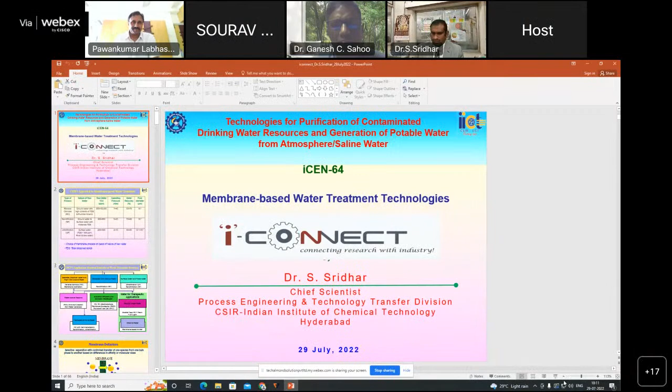Thank you very much, Dr. Pawan. I hope my screen is visible and I am audible. Yes, and really very happy to be on iConnect and also to present our experiences as far as water treatment is concerned, especially membrane-based water treatment.

As Dr. Pawan has introduced, this is mostly for purification of contaminated drinking water resources, as well as generation of potable water using an atmospheric water generator, and also treatment of saline water.

So mostly CSIR's approach to membrane-based water treatment has been based on the TDS as far as drinking water is concerned, based on the total dissolved solids. Several labs led by CSMCRI Bhavnagar, with their indigenous RO system, have been treating groundwater, brackish water and seawater with desalination, using seawater RO membranes and brackish water RO membranes.

We also operate at high pressure, and we now have nanofiltration technology coming up quite well, with IICT contributing for moderate TDS groundwater, because we need a TDS below 500, and it is not necessary to go for RO for all the different types of water resources that are available.

So for moderate TDS groundwater, and to some extent surface water, with lower rejection nanofiltration membranes, we can treat both moderate TDS groundwater and surface water.

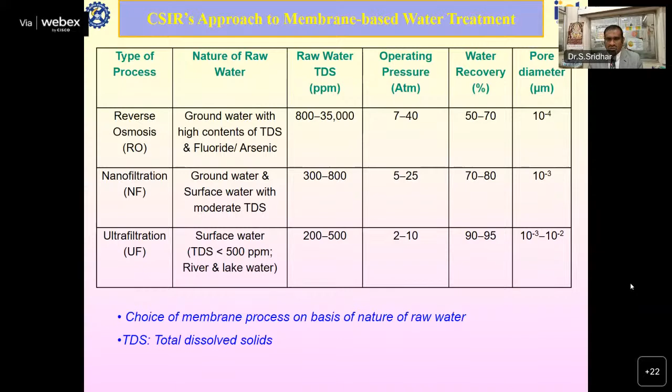Apart from CSMCRI, IICT, NEERI Nagpur is quite involved in these activities, and then CSIR-CGCRI is also there. NCL Pune has been in the forefront, and CMERI Durgapur is also there. So all these labs have been working on this.

IICT's application has been an application-oriented selection of water treatment processes. As we can see here, seawater and brackish water RO has been at the forefront for high TDS groundwater and sea and brackish water, whereas for moderate TDS groundwater we have preferred nanofiltration over RO.

And then for flood water, especially during the floods in Kerala, and then of course in Maharashtra in Sangli, and then Gokak, etc.

In Karnataka, and also several states - Bihar, Assam - we have covered Orissa and West Bengal. We covered West Bengal with nearly 10 plants for both Yas and Amphan cyclones, using hand pump operated ultrafiltration systems, which can later be converted to power driven ultrafiltration once normal power supply is restored after the floods. At some points we have also tried nanofiltration for pond water.

In water scarce regions, we are looking at atmospheric water generators. I'll show a brief video on that.

As far as industrial effluents and domestic wastewater are concerned, apart from the pressure driven processes, we have also tried electrodialysis. CSMCRI is working on unsupported membranes, which work very well for electrodialysis - they are polystyrene based. We have also been using electrodialysis for desalination and deacidification of effluents, and we also have membrane bioreactor technology across CSIR and microbial fuel cells.

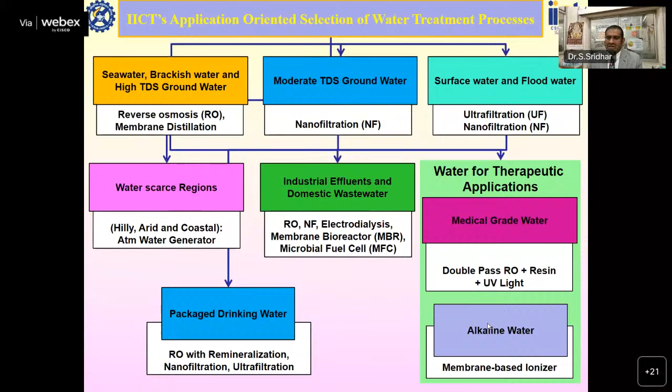Then recently, alkaline water up to 8.5 pH is preferred, so that we are within the BIS limits, but at the same time it can prevent hyperacidity and joint pains.

I will not go too much into the detail of what exactly membrane processes are, as most of you will be aware of that, but just for the sake of the audience - a membrane is a thin barrier that separates the components of a liquid or gaseous mixture based on not only molecular size, but sometimes affinity based separation as well. So size based exclusion at times, depending on porous membranes, and when you have non-porous membranes, you get affinity based separation.

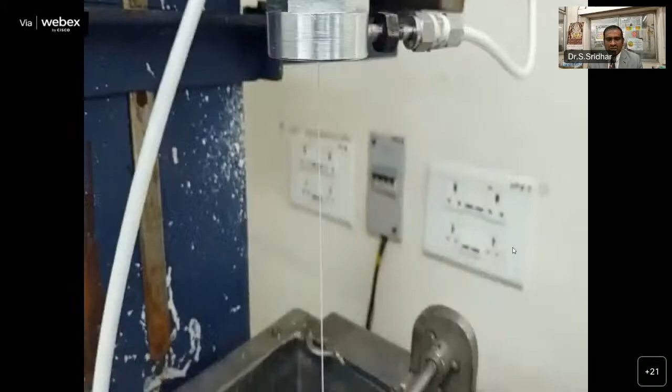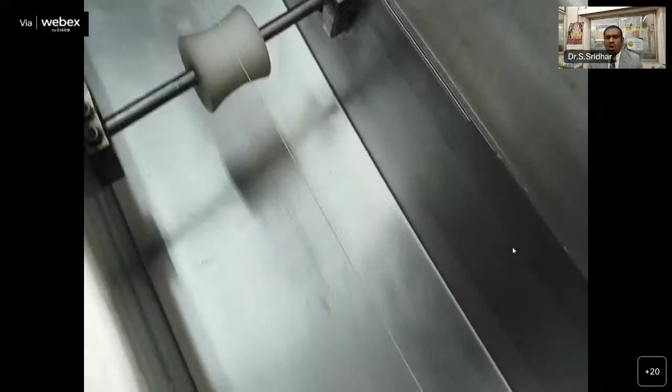This is a video on the hollow fiber membranes being developed at IICT. You have a polymer tank here, and then you can see the hollow fiber membrane, which has a bore generated by using a bore fluid. Polymer fluid flows on the outer concentric opening, and from the inner opening you have a bore fluid coming out, which is mostly water, mixed with a polymer solution in a solvent.

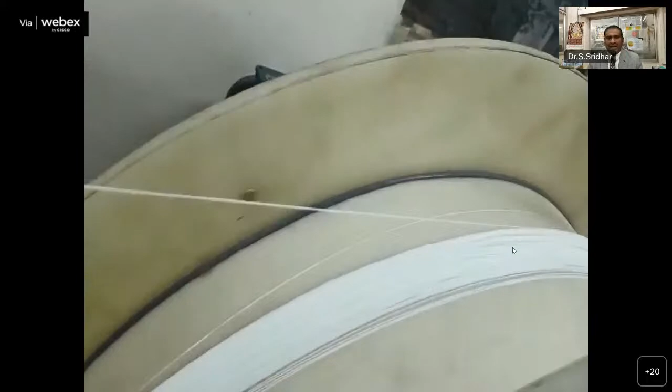You get a homogeneous honey-like solution of viscosity about 5000 centipoise, and then you can draw fibers at the rate of 30 meters per minute. With a 1 kg batch you can draw about 5 to 6 kilometers of fiber and make several modules from that - so high surface area per unit volume, ladies and gentlemen.

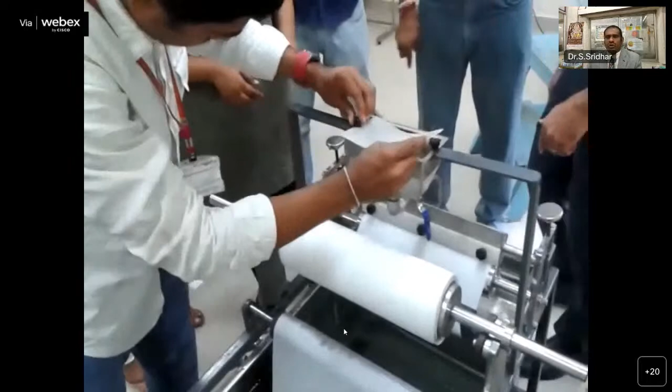We also have flat sheet membranes, and this particular machine gives a flat sheet of 14-inch width, which is then trimmed down to 12-inch width, and modules are made. Larger machines are also available at CSMCRI Bhavnagar, who make bigger modules - that is 8-inch modules as well.

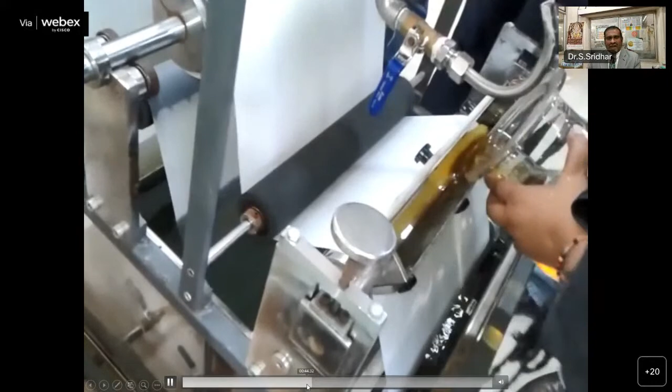These systems now use, for example, the phase inversion technique for flat sheet. Here, unlike the hollow fiber, it is not a self-supporting structure, but you have a porous substrate that gives mechanical support to the membrane.

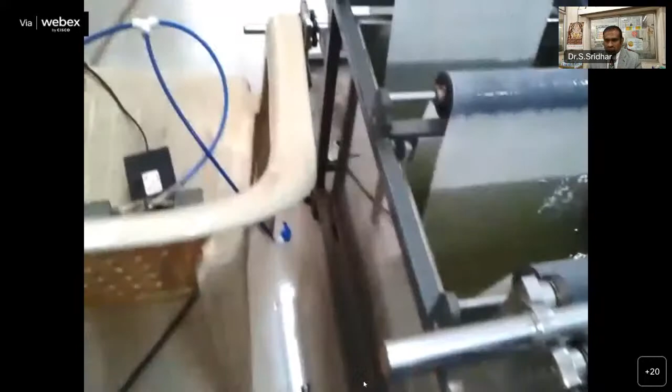After phase inversion - now, for example, we have polysulfone in dimethyl formamide solvent - you get the membrane coming out here, and that is how it finally looks. This is the shiny side of the membrane. This is an ultrafiltration membrane, and it is coated with another layer by interfacial polymerization to get the final product.

So several membranes can be made for different applications, and the focus of this theme has been mostly on thin film composites for RO and nanofiltration, where we use piperazine as the aqueous reagent.

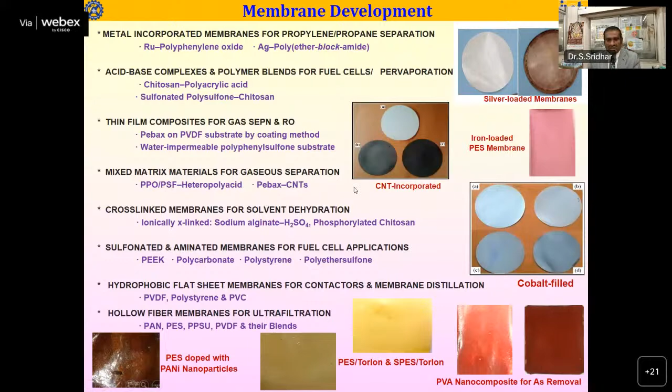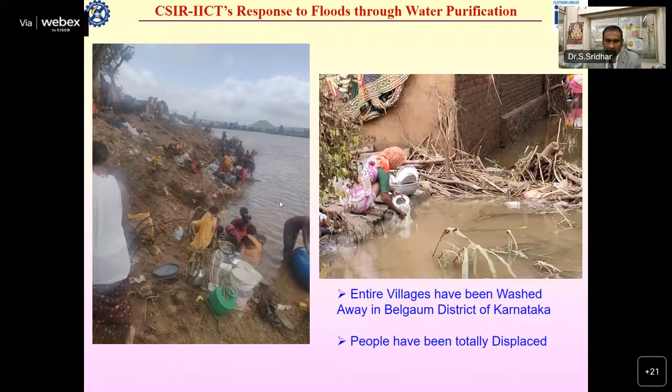So we come to the next application - treatment of surface and flood water by ultrafiltration, and we also have nanofiltration. This has been CSIR IICT's response to floods through water purification. During the 12th 5-year plan, with CSMCRI as the nodal agency as well as NEERI as one of the partners, we jointly developed this technology, based mostly on molecular sieving to remove turbidity and microbial content, including bacteria and virus.

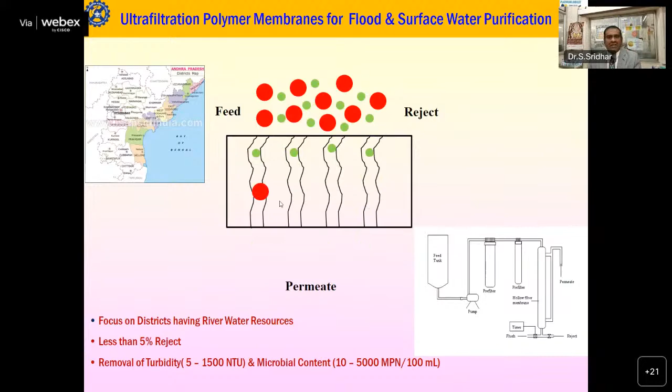We have a smart chlorine cartridge too - now you can see the hand operated scheme here, and instead of a chlorine tank, you have a smart chlorine cartridge here.

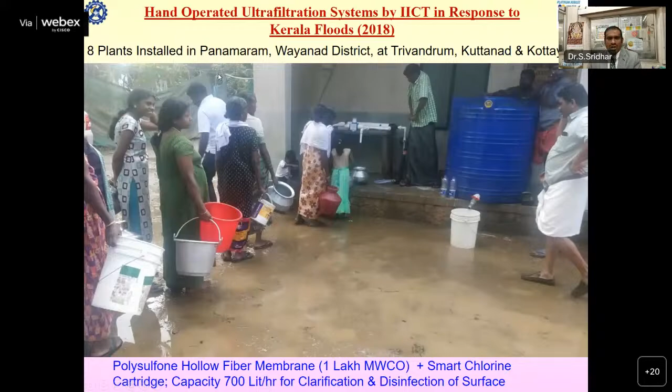As you can see here, you can see the difference in the water, and these are some of the submerged modules where you are using suction pressure to draw the water. Here there is positive pressure, and this was implemented in Wayanad, Trivandrum, Kuttanad, and Kottayam. 8 plants were installed, and you can see the water being drawn by a hand pump. Later it can be replaced once the power is restored.

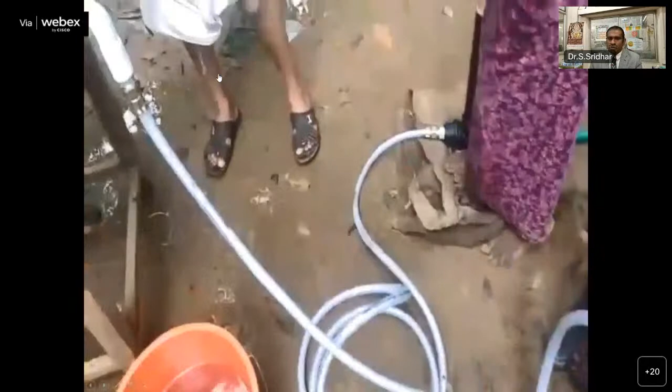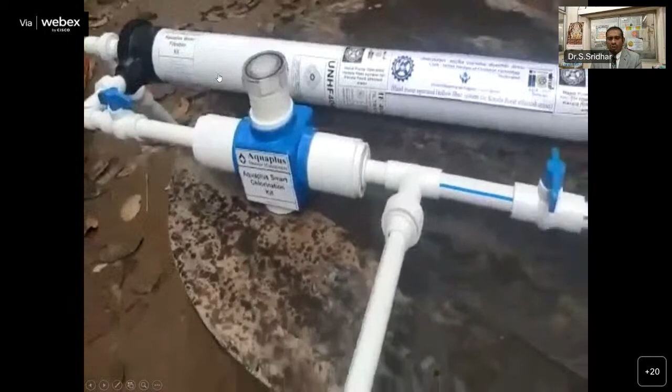We can replace it with the electric pump, and now the hand pump pushes the water through the pre-filtration micron filter cartridge to remove most of the turbidity, and then the membrane takes care of the bulk of the microbes and colloidal impurities, and you can see crystal clear water coming out. A smart chlorine cartridge is provided to take care of any secondary contamination. Here you can see 700 liters per hour is the capacity, and you can see the clarity of the water.

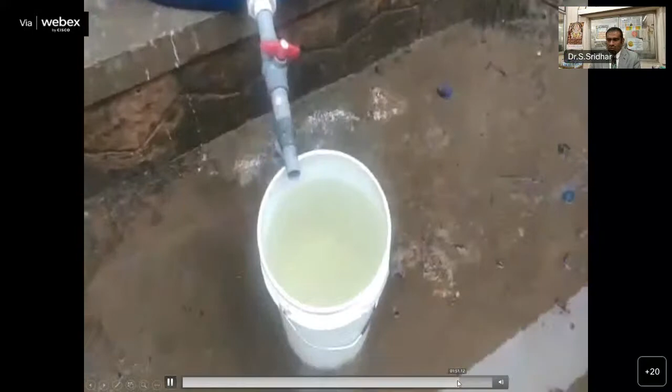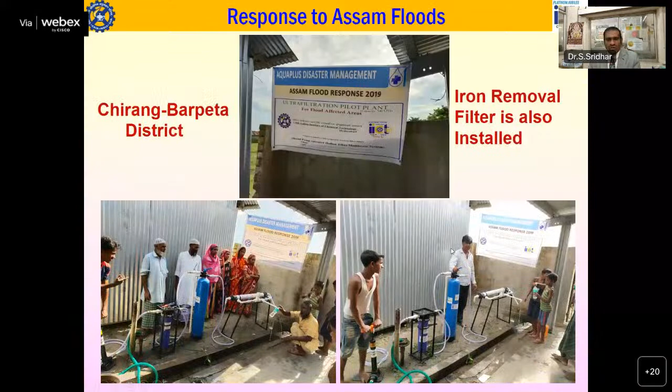During floods, it is very important to prevent waterborne diseases like jaundice, typhoid, cholera, gastroenteritis, etc. This was a response to Assam floods, Chirang, Barpeta, along with installations in Karnataka and Maharashtra. One important factor in the analysis is that bacteria content is 0, and the TDS is always within range, so it doesn't really filter out any TDS, but it removes the turbidity and microbial content.

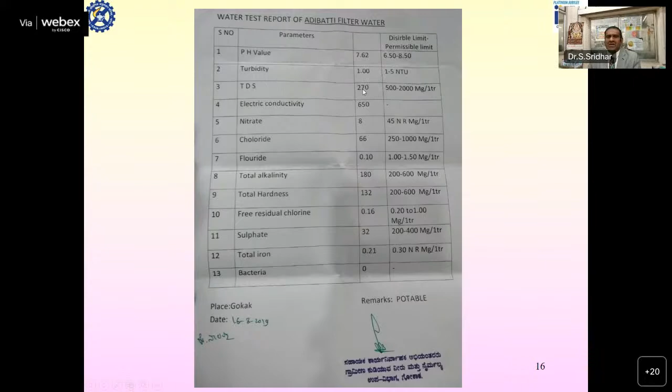This is from the Amphan cyclone, and it was a little challenging because of the COVID situation. We had to struggle a bit to reach the remote areas of South and North Parganas, 24 Parganas district, and we were able to supply water to quite a few thousands of people, with some installations in schools as well.

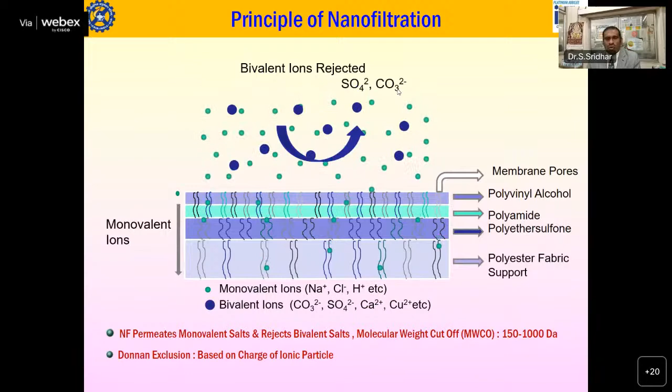Now nanofiltration, we can see that most of the hardness is removed, only part of it is allowed, and most of the monovalent ions are allowed. So this can be used for surface water, pond water.

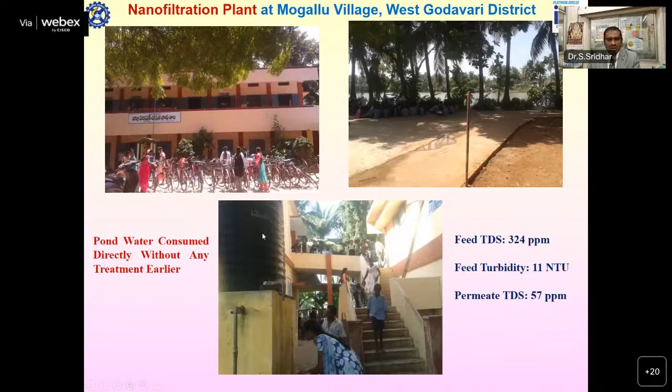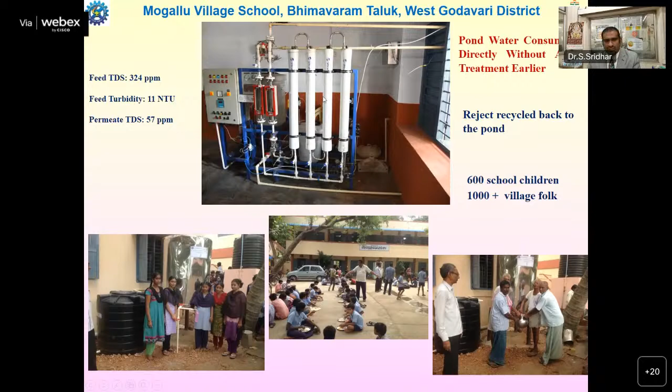We came up with this vertical modular plant, and you can see the ozonator here. You also have a small UV here, and this is about a 1000 liter per hour plant, running very successfully for the past 4 years or so.

This is one at Gandhi Hospital in Hyderabad, which was commissioned in January 2019, and it serves not only the patients, staff, and doctors, but also the attendants.

Reuse of reject is very important, especially since the reject is a much smaller volume in ultrafiltration, less than 5%, whereas in nanofiltration we can reduce it to less than 20% and reuse it for washing and other applications.

Here in IICT itself, we have a model plant which has been used for the last 9 years for cooking, and the entire beverages and food is made from that, while the reject water is used for washing the vessels, etc.

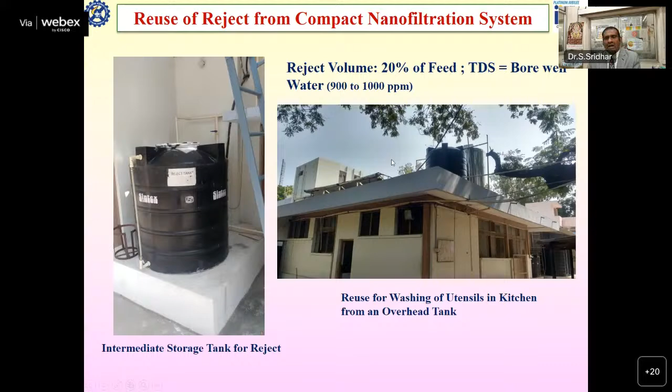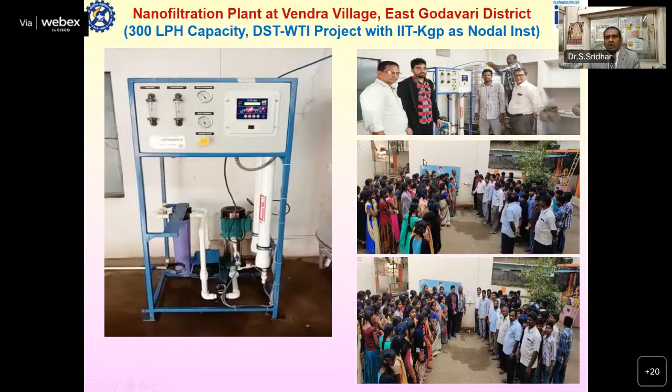This is in Vendra village, where IIT Kharagpur is the nodal agency, and we have this plant installed there, a 300 liter per hour plant for the school children. Again, moderate TDS groundwater, 700 down to around 300, which is fine.

Then there are drinking water camps based on nanofiltration at Hyderabad exhibitions, and also in school exhibitions where we have trained school children as well.

This is a free drinking water camp on the airport road, and it has been quite active until the COVID period, and we are now going to revive this. It is basically for urban development, serving all the pedestrians, commuters, and bus drivers, and it has almost become like a virtual bus stand.

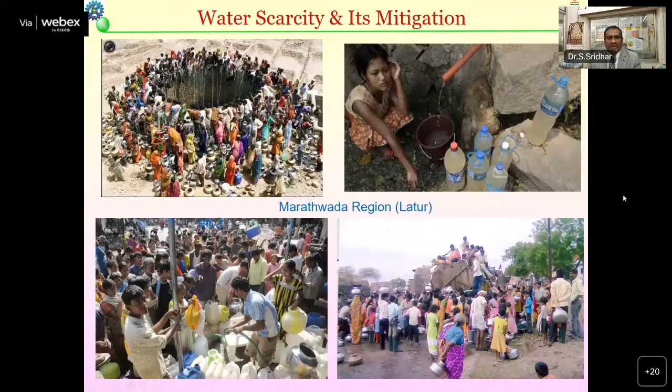In coastal areas and hilly areas, like for example in Shimla, schools were shut down for some time due to excess tourist load and lack of water there.

So groundwater is very scarce there, but there is plenty of moisture in the atmosphere. Relative humidity is more than 90%, so here it works very well. For certain areas like border areas, Coast Guard, Border Security Force, and coastal areas, this is very useful.

In Hyderabad, there is a company now making bottled water from water drawn from air. It has a 5,000 liter per day system, and the air goes through the pre-filter, polypropylene cloth with 5 micron pore size, and hits the evaporator, just like in AC or refrigeration, where the compressed HFC gas evaporates and brings about cooling. The water is collected and remineralized with rock salt and a proprietary salt mixture, and the exhaust air is removed immediately. The compression and evaporation cycle goes on for the refrigerant, around 55 degrees is the compression temperature, and 4 degrees is reached at the evaporator for the dew point of water.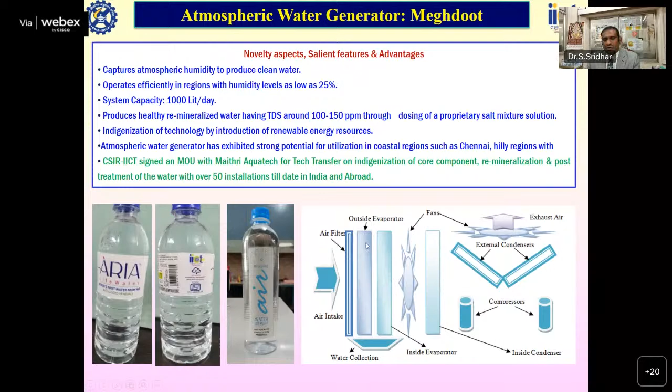So this is the cycle that you can see, and we have this Meghdoot system going on here, and you can see the water coming.

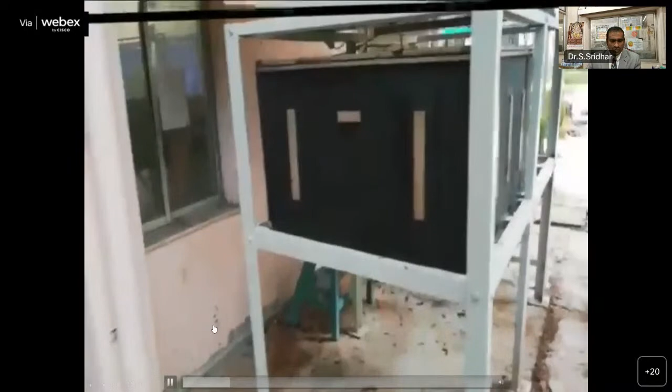Here you can see the water drawn from the atmosphere. It has been installed in several places, including Kerala flood relief, and these are recent installations in Uttarakhand. And this is defluoridation of groundwater, which we are quite familiar with, and the reject has to be disposed carefully.

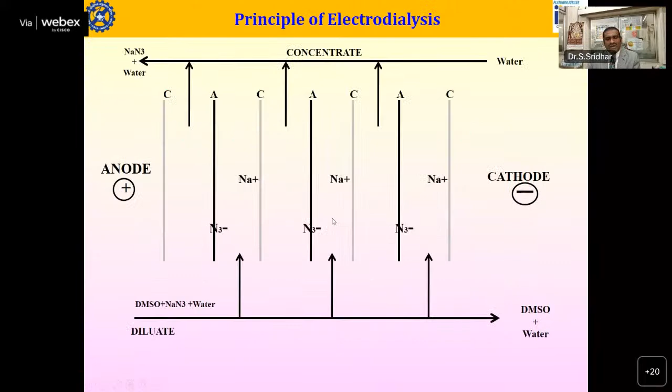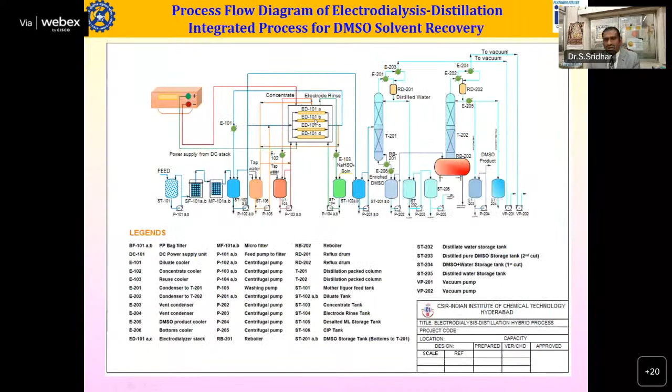Industrial wastewater treatment, such as pharmaceutical effluent. I'll give an example of sodium azide separation from DMSO. Sodium azide is separated by electrodialysis so that the liquor of DMSO and water doesn't explode. Then we go for distillation, first stage and second stage, after removing the explosive sodium azide, and plenty of DMSO has been recovered and reused for making the antiretroviral drug zidovudine.

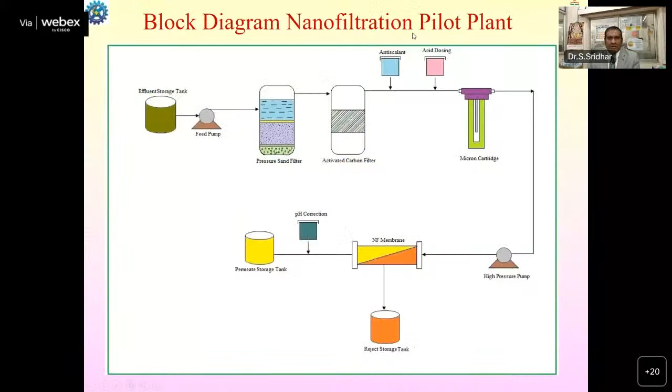The block diagram of the nanofiltration plant has two pumps running in tandem. Thiocyanate is used as a solvent, and this solvent is purified by nanofiltration, which allows the monovalent thiocyanate to pass through while the bivalent ions are rejected. Similarly, at Tata Steel we have a high recovery plant with 80% rejection and 85% water recovery, where only chloride is brought down to less than 500 ppm.

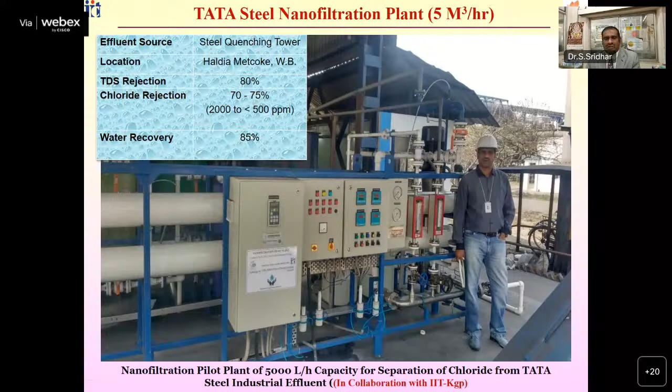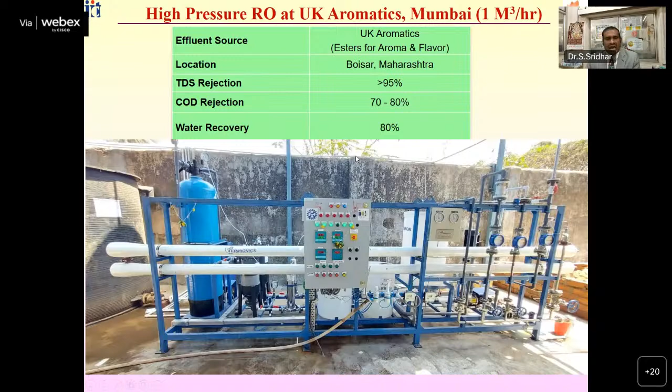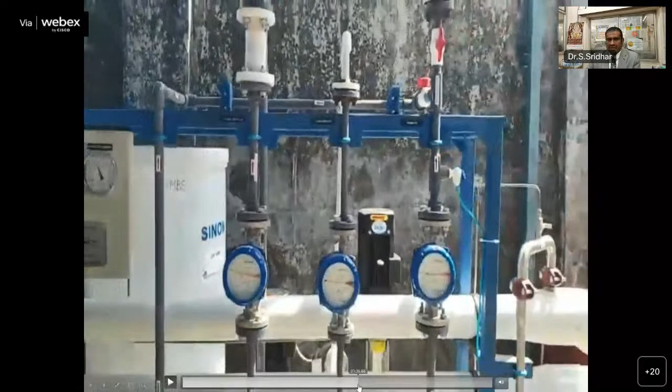This is a recent one, high pressure RO using a thicker RO membrane, working very well at Boisar in Maharashtra for treating aroma-containing effluent. I'll show a brief video and try to conclude here. This is the pre-filtration section, these are the membranes, and you can see the conductivity values, with high COD rejection, more than 70% COD rejection in the water.

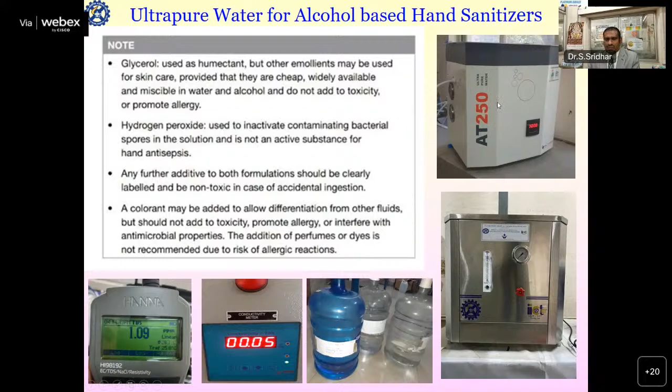Then there's ultra pure medical grade water, which we already discussed, and I would like to show these two systems. One is in plastic body, an import substitute for Milli-Q and Sartorius. This is a metallic body, and this is the polymeric body, and it has been very widely used for dialysis and also for lab grade water.

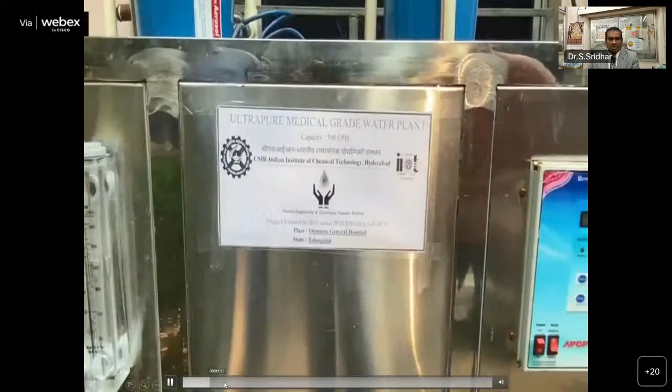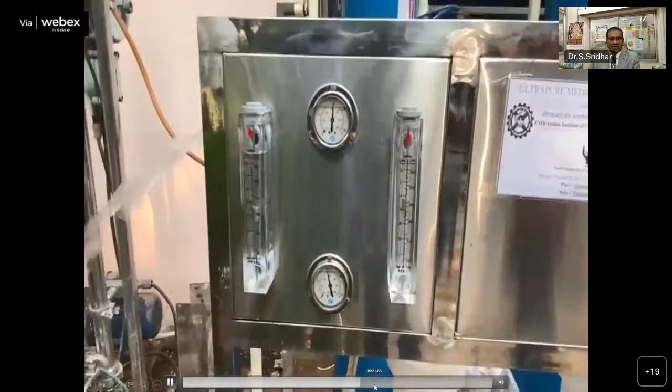This is a video of the system that shows the flow rate now, a double stage RO with resin hydrophilized polyamide, so we don't have to intervene with any chemical washing. Now we can see it has gone into the resistivity level, so it shows nil TDS, but actually it is at resistivity level.

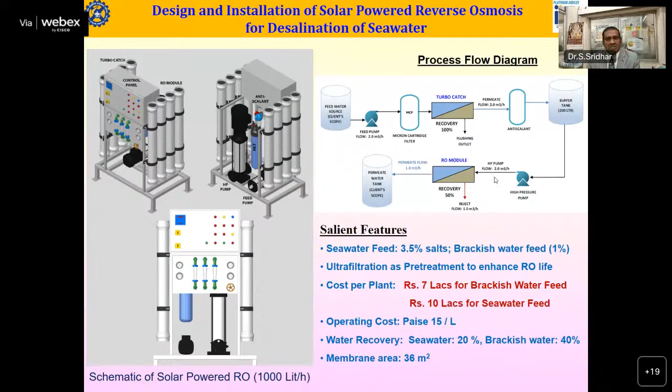As you know, ladies and gentlemen, these are some of the challenges which we will discuss during the panel discussion. Future prospects involve UF aided moving bed bioreactor for STP, solar powered RO, and atmospheric water generators for coastal areas, as well as atmospheric water generators for arid zones including Latur—we are targeting Latur. Thank you very much for your kind attention, and I will answer your queries in the chat box.

Truly, in today's scenario, technologies for treatment of contaminated wastewater along with sludge management are of today's concern. Several CSIR labs are working in this area. I will showcase a few of these technologies, which are really very challenging, but the main concern stems from wastewater related issues.

In the Indian perspective, up to 2025 there will be 843 billion cubic meter of water demand, which will rise up to 1180 billion cubic meter. Currently, 54% of Indians face high to extremely high water stress. This can be solved if we consider effluent waters.

61,754 million liter per day of wastewater is generated, of which only 22,963 million liter per day is taken care of. So for the rest of the water which is left untreated, if we consider treating it with our existing CSIR technologies, I think it will be the viable solution.

Today there are so many eminent panelists, speakers, and several industrial partners present. If we all join hands together, then perhaps from the CSIR portfolio we can give the proper ultimate solution to our community, and this will be the best solution in this auspicious event, in the context of 75 years of Azadi Ka Mahotsav, and the best tribute to our Mother India.

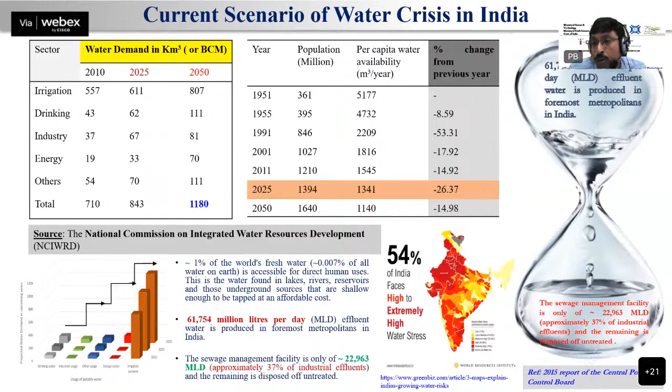There are several CSIR product categories. I won't go into full detail, but there is the CAACO-based treatment plant and also the hybrid wastewater treatment technology. The CAACO-based treatment plant is already well tested, and can produce from 50 meter cube per day to 120, to 750, and even up to 2000 meter cube per day. So why not spread it to several places? Similarly, the hybrid wastewater treatment technology is another option.

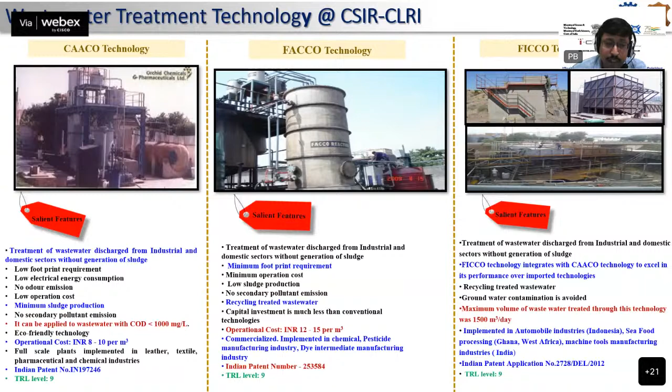Considering the chemoautotrophic activated carbon oxidative technology, this is the most primitive one, and there are also others like FACCO technology and FICCO technology. FICCO is the excel grade, performing up to the level of imported technologies. If we look at their specifications - low odour emission, electrical energy consumption, and operational cost - we can understand these technologies can be adopted in coming days. These products are already at a high TRL level and are IPR protected.

Similarly, there is also the Phytorid plant-based technology, which is already well acclaimed and advertised throughout CSIR and other places. It has high TRL, no foul odor, no mosquito nuisance, small footprint, and minimum electricity requirement. These are the unique features - it uses immobilized microbes for treating municipal wastewater in a more efficient manner.

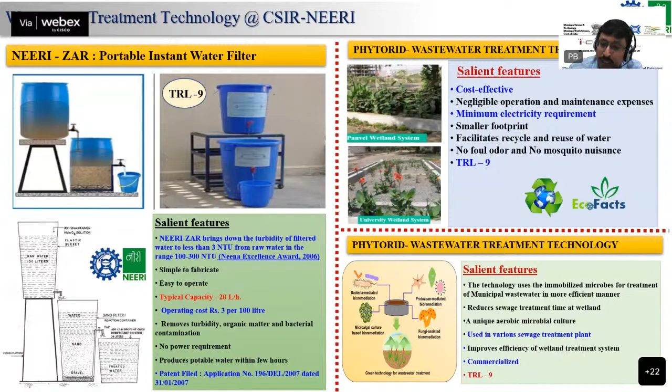Among these pilot-based technologies, there are also several developed by CSIR-CMERI and CSIR-NIIST. Numbers 1, 3, 5, and 6 are from CSIR-CMERI, already developed as wastewater treatment technologies. I won't go into detail due to time constraints, but if you're interested, we can discuss it with our business development group. These are very straightforward, compartmental systems for purification, and one of the best is the vehicle mounted mechanized drain cleaning system.

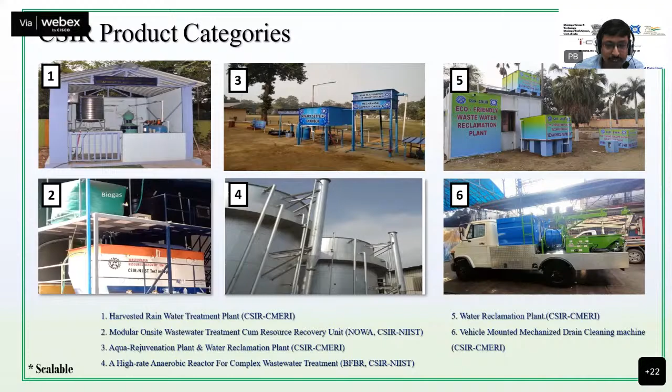This is one of the new features added in CSIR-CMERI. Regarding the a high-rate anaerobic reactor for complex wastewater treatment and the NOWA technology, these are also well documented. It can handle COD 500 to 4,000 milligrams per liter. It is economical, IPR protected, and can be utilized for treatment of organic rich wastewater from small establishments like canteens, restaurants, etc.

Similarly, for the buoyancy-based anaerobic reactor for complex water treatment, the BFBR, it can take care of complex wastewater containing high COD, oil, fat, and other anaerobic wastewater. If we can advertise these technologies in a bigger manner, then whatever problems come in converting wastewater to potable water in coming days, we can solve those issues.

Now, regarding the CSIR-CMERI vehicle mounted mechanized drain cleaning system, this technology is wonderful because in terms of cost effectiveness, compared to existing technologies in the market which are improved but costly, this one is available at a really minimal cost.

Its specifications include a jetting pump of 35 horsepower, suction pump of 5 horsepower, and a mechanical filter. Water will be used for the jetting system, so no extra water is needed from outside. In other technologies in the market, they have to bring water from outside, but here the in-situ water will be purified and taken care of. It is a 4-stage eco-friendly purification system with a proper suction pump, and this drainage water will be reusable for agriculture purposes, and it is quite reasonable.

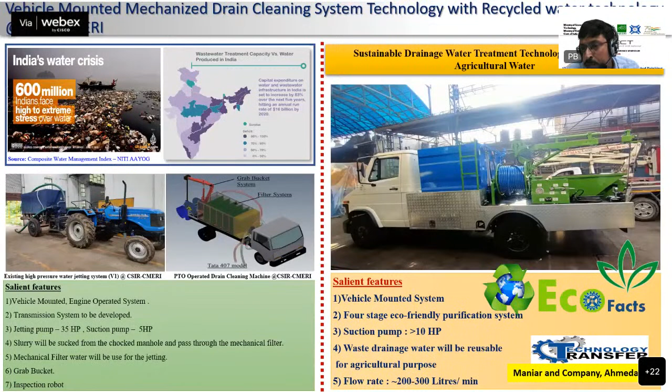I think today there is also Dr. Maniar and Mr. Makiraju, the industry partners, who will tell about this briefly. Now, Dr. Sridhar also told many things, and Dr. Pavan Lepshetar also told about the Nalgonda technique, so I am not going into detail on that part.

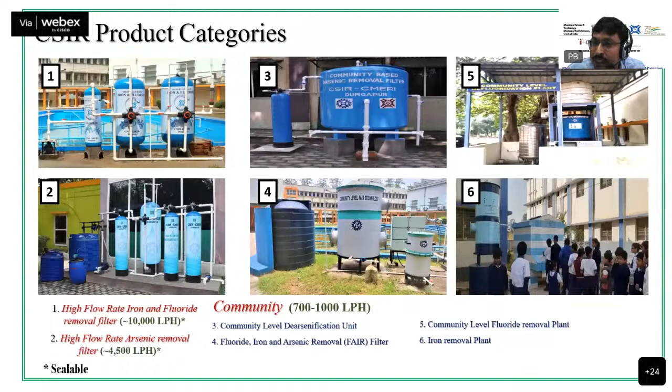My point is that whenever fluoride, iron, arsenic like contaminations are there, we have to think about the requirement, sometimes at domestic level, sometimes medium level, sometimes bigger level. Based on this criteria, we have developed and designed several water treatment plants. This is the beauty of CSIR-CMERI, as it is a mechanical engineering lab, so we have designed these in such a manner that you can control the flow rate without compromising water quality. That's why from 1 to 6, all are different fluoride, iron, arsenic removal technologies, ranging from a few liters per hour for domestic use up to 10,000 liters per hour.

Now, of the defluoridation, deironation, and dearsenification units, the dearsenification unit is already awarded winner of CSIR Technology Award 2017, with a good TRL level, being a gravitational based filter. Similarly, for defluoridation and dearsenification, all the details are depicted here - raw material cost, equipment cost, everything we have pointed out. All three technologies are IPR protected, well implemented, and the technology has been transferred to several places.

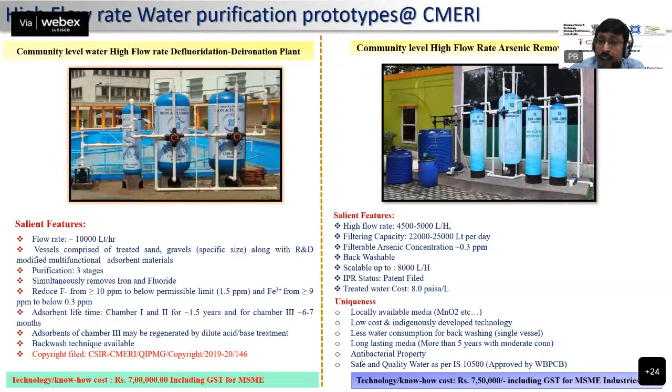Now, when the requirement is bigger, from 5,000 liters to 10,000 liters, that is also taken care of by the CSIR-CMERI scientists and technicians who designed it in such a manner that the flow rate will be controlled for that particular capacity. The adsorbent lifetime is quite reasonable, with a simple backwash technique for adsorbent reuse, and adsorbents are also managed for the sludge management system.

Now there is another technology called FAIR, where fluoride, iron, and arsenic removal is handled - 3 problems taken care of with one solution. You can see the technical specifications. Purification is 2-stage and at a very nominal charge for the water. There are 2 variants - one at domestic level, one at pilot level.

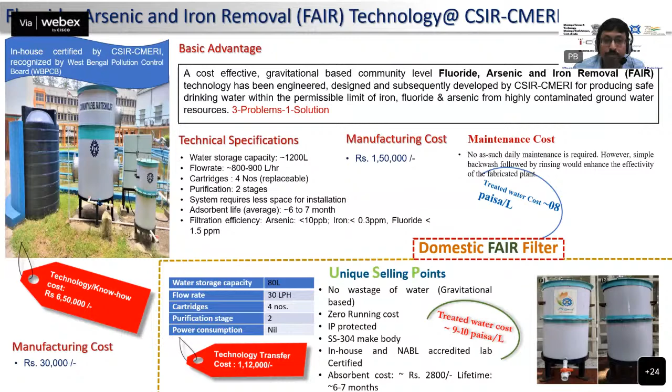So now this is the best technology I think the CSIR NEERI has developed - the electrolytic defluoridation technique.

This is one of the best in its category when the electricity requirement is there, with DC power simple to fabricate, and it produces potable water with a palatable taste as against other treatment methods. The cost is very reasonable, only rupees 25 to 30 per 1,000 liter, capacity wise 2,000 liter per batch in 3 to 3.5 hours.

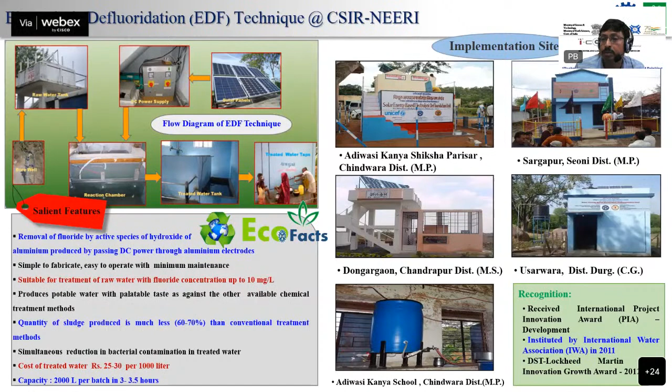This is a really good technology, great technology, because it has already received several accolades in its favor, recognition from national as well as international places - PIA award, IWA award, DST Lockheed award, everything backed by this technology. It is also well implemented in several districts in Madhya Pradesh and other sites. So if industrialists implement this type of technology in time, it will perhaps be the best solution in the context of India's wastewater management.

Now I am not going in detail because there are also several other technologies from CSIR CMERI, like drinking water resources when we can harvest rainwater. What Dr. Sridhar also told in his slides, there are several technologies in the harvested rainwater system. Herein the beauty is that we have implemented adsorbents which are readily available in local areas. So these porous substances, we did post-synthetic modification with a flow rate of 2,000 liter.

It is very reasonable - cost of the treated water is very less, with an easy backwashing technique. Similarly, for the aqua rejuvenation plant, which is highlighted for irrigation purposes with a 15 to 20 KLD capacity, the main emphasis is on adsorbent-based technology, and the adsorbents are all patent protected. These adsorbents have high surface area, which helps them remove waste in a proper manner, using local resources along with R&D modified multifunction adsorbent materials.

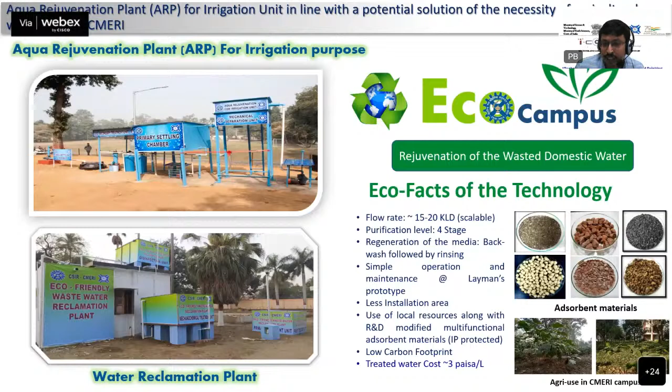Now this is another technology - yes sir, only a few slides. So with CSIR IICT, they have also produced several biosac processes for industrial wastewater treatment.

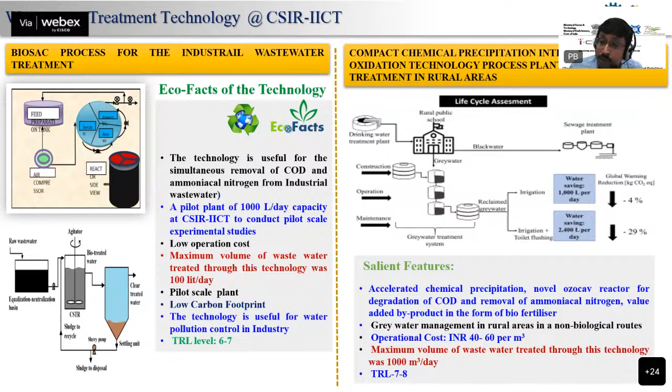This is a beautiful technique wherein simultaneous removal of COD, ammoniacal nitrogen is taken care of, and this is also very good technology with low carbon footprint. Similarly, there's the compact chemical precipitation integrated advanced oxidation technique - it's beautiful because COD and removal of ammoniacal nitrogen is taken care of. You can see that these technologies are specified in such a manner that they can be efficient in specific areas, so if we combine all those areas and specifications, we can give a wonderful solution.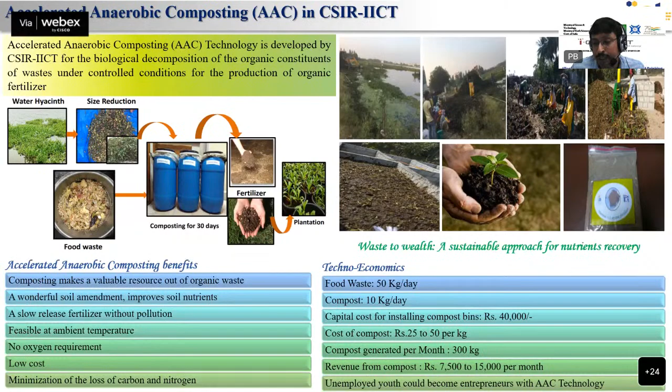So now chemical sludge management - this is the last slide from my side. CSIR CLRI is producing a sequential oxic anoxic bioreactor (SOABR) and co-digestion of tannery solid waste. CLRI is doing this in a very fantastic manner - the oxic and anoxic zones are taken care of, and the suspended particles are removed by the oxic zone through interception method, while the anoxic zone digests the solids scavenged by the oxic zone.

So regarding the co-digestion of tannery solid waste for biogas generation, it is also another one wherein the disposal problem of fleshing and WAS in the tannery sector can be minimized.

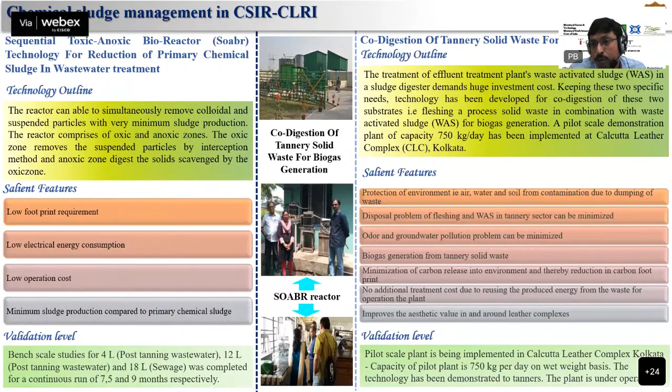Thanks a lot, Priyabrata. It was a very, very good presentation, and you have complemented what Sridhar has already spoken about. It really gives the feeling of CSIR, team CSIR, because we are presenting these treatment technologies developed by many institutes of CSIR.

If Dr. Sridhar is around, I have a question for him, to break this monotonous routine of presentation. There's a question from the audience, Sridhar, for you: what is the cost per liter of atmospheric water? Can you please elaborate on it? You mentioned it before, but it will really benefit the audience to hear more.

If we go for a 1,000 liter per day plant, it comes around rupees 2 per liter, or around rupees 1.5 per liter. And if we go for a slightly smaller capacity, say around 150 to 250 liter per day, then it goes to around 2 rupees per liter. So 1.5 to 2 rupees per liter is the cost of atmospheric water.

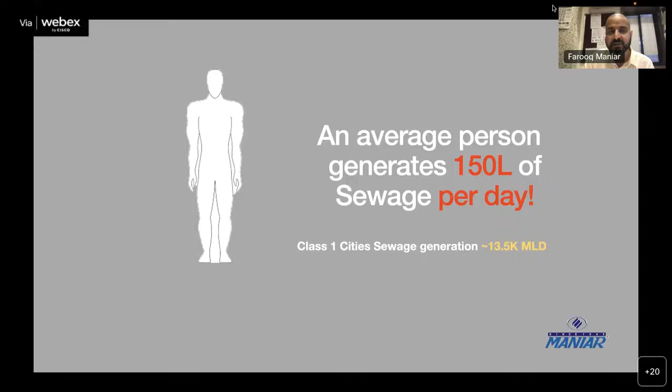So what's the problem? When the cities were developed, the government put in certain infrastructure keeping in mind a certain population. What happened was this infrastructure was not developed to sustain the influx of extra people moving to cities. This has caused completely filled manhole chambers, choked pipelines, and overflowing drainage water systems. Everywhere you see, we are seeing these problems. Now there are solutions for all of these problems that we have developed over the period of years.

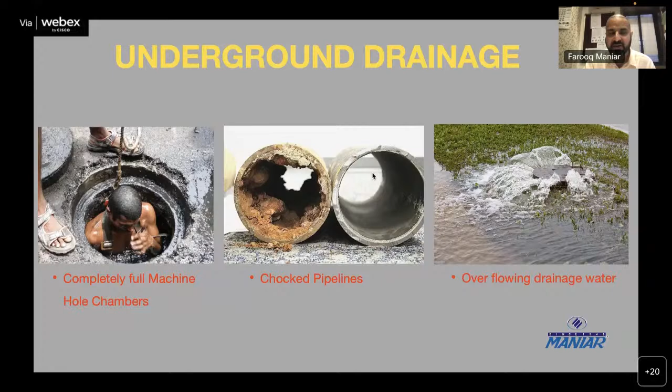We'll go over them and why that's important. Let's talk about the first one: the manhole chambers. Traditionally a human had to go into it and clean up this sewage manually, and that was not humanly dignified. This is the problem in the traditional functionality where the man is going inside. But what we developed was a desilting machine back in 2005, which solved this particular problem of not having to send a man under the manhole chambers, saving a significant amount of lives over the period of years. We did get a significant award from our Prime Minister Narendra Modi, when he was Chief Minister of Gujarat, for the innovations we did in the prior years leading up to Decent Man for human dignity.

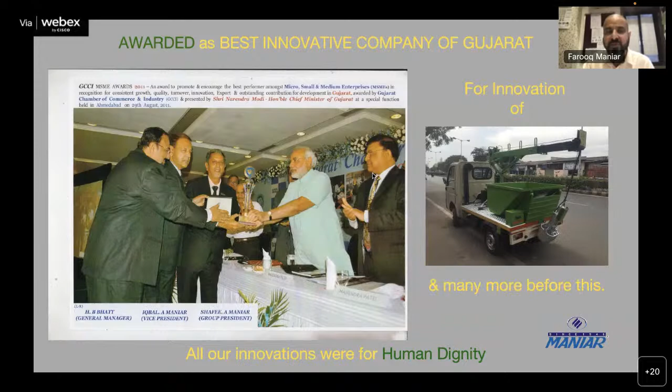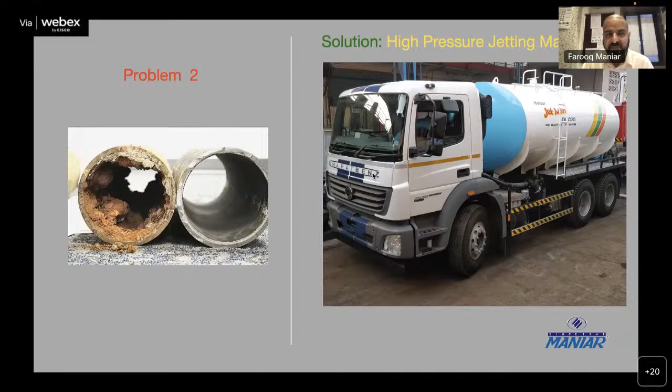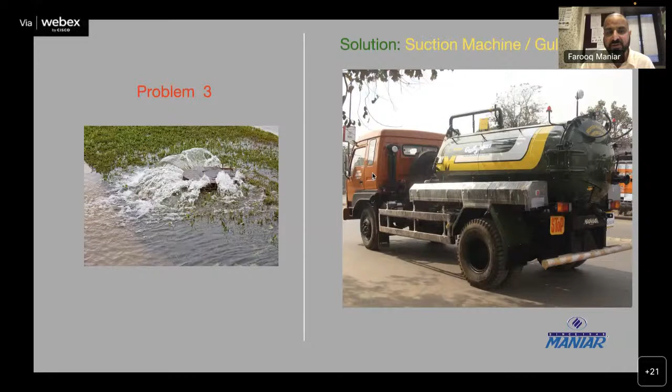But we didn't want to stop there. That was problem one, solving the manhole chambers. Now there are clogged pipelines in the infrastructure, the second part of the drainage system. When these are clogged, we have to use high pressure jetting machines to unclog them using water. When we use water, we are using clean water systems, so we are essentially adding to the problem of sewage water that we already talked about. The third thing is the overflow drain, and for this we developed the Gully Man, which can help avoid these overflow drains.

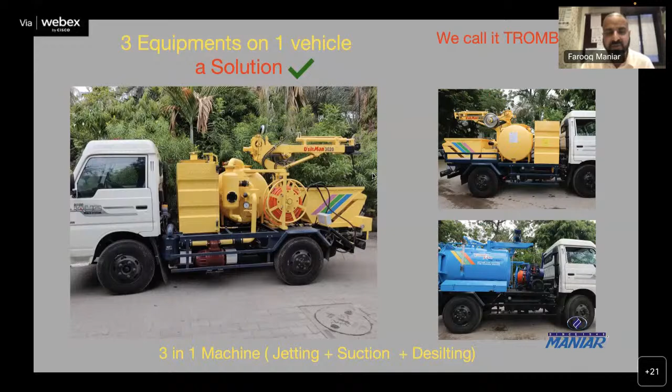But why innovate, right? We have the solution. What we saw was that these are three individual products, but not a solution. We needed three different vehicles, more workforce, more diesel consumption, and this is not scalable as cities scale and more humans move to the cities. So what we developed was a solution called Trombiman that allowed all three equipments to be on a single machine, or single chassis, solving the problem of jetting, suction, and desilting in one. So you can use one human to do all three jobs, saving a lot of time, energy, and human resources.

But then why stop there? We always need to push the boundaries. What's the need to push the boundaries? We see that in India we always have a scarcity of water.

We have limited water on vehicles. With all the equipment getting onto a smaller vehicle, there is only so much water capacity that we can carry. And if you see, trying to get foreign machinery, they are super expensive.

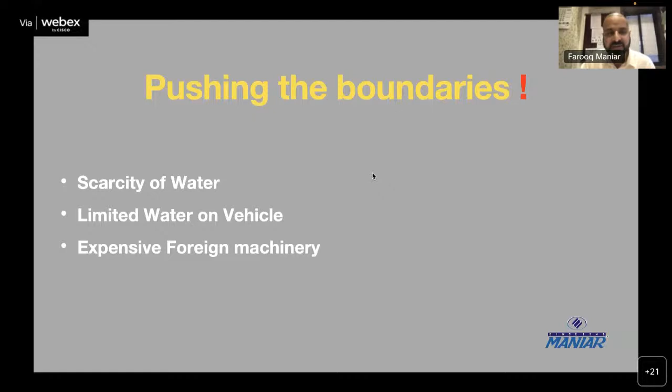So it's important to somehow solve this problem, and that's where we jointly developed this vehicle with CSIR, which is the final result. This has all three things we talked about: the high pressure jetting machine, the desilting machine, and the recycling facility, which solves the three drain problems we talked about, including the manhole chambers.

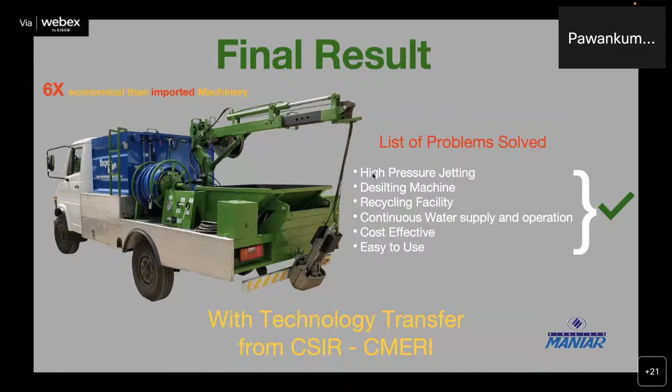Now the benefit here is that with the recycling facility added to this innovation, we don't need to necessarily carry all the good clean water to clean the underground drains. The high pressure jetting machine can use the underneath drain water itself, self-clean it using the recycling machine, and then use it for jetting purposes. This solves the problem of not having to install a huge tank, saves a lot of trips, saves clean water usage for cleaning purposes, and ultimately avoids adding to the gray water problem in the industry.

The other benefit from this joint partnership is that this vehicle or innovation is 6x more economical than the traditional imported machinery. So as you see your city's infrastructure needs, please reach out to us so we can help design and plan for the work needed to solve this liquid waste management problem. We have the solution for you, and we can work together to solve these problems. With that, I'll conclude.

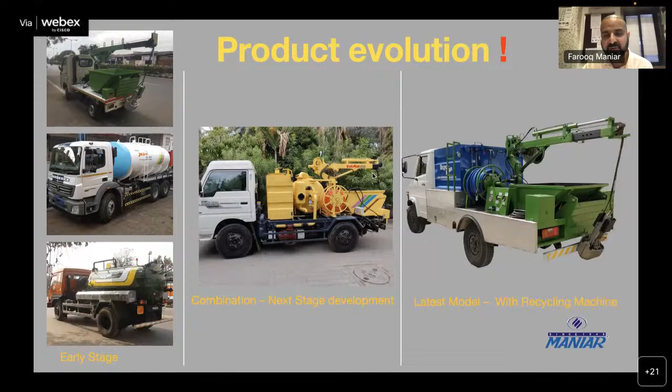We have also added the latest technologies such as a camera, which can look into the drain systems to see which area is clogged and clean it up accordingly, just by watching from outside through the screen. So we continue to innovate and improve the product as we speak. We'll be happy to work with you if you have any specific needs, and you can feel free to reach out to us. Our details are here.

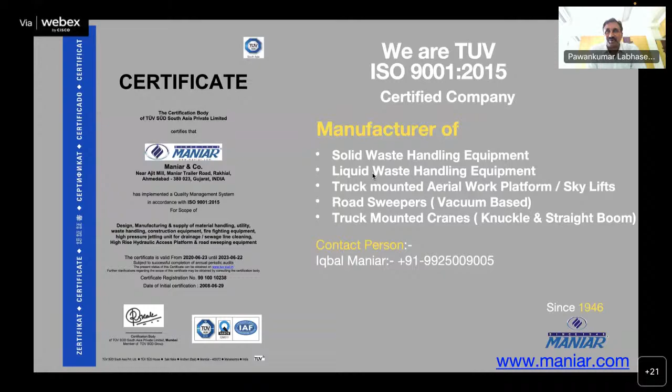Thanks a lot, Mr. Maniar. It's very good to know about this innovation. I was always talking about taking technology to the field, and this is an added component of innovation. This is a win-win situation for both CSIR and the industry partner. We need more such partnerships in the future, and you have shown the path forward, so that we can collaborate such that 1+1 will not only be 2, it will be 11. Thanks a lot for your inputs, and we'll come back to you with questions.